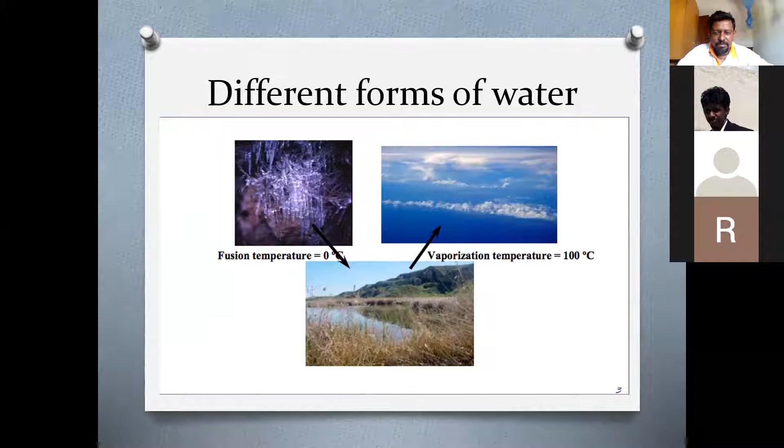Now, this is highly helpful for plants and animals to survive. For example, if water had different temperature ranges, today we would have never evolved into humans.

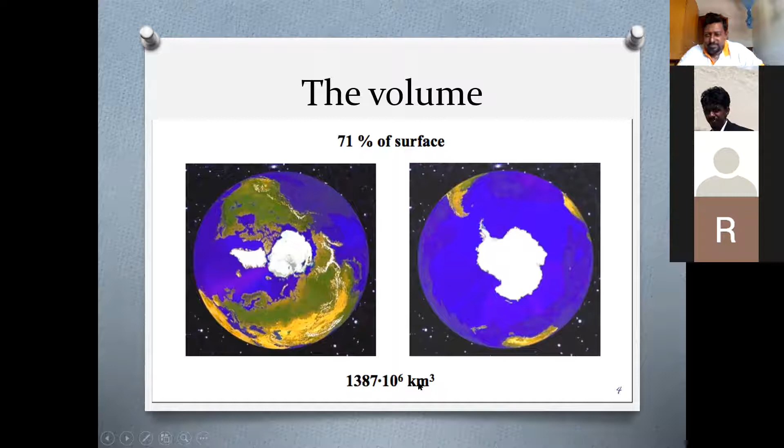Now, when we talk about the volume, 71% of Earth's surface is covered with water, which is roughly 1387 into 10 to the power 6 cubic kilometers. That much water is available on planet Earth. So basically it's a water planet.

So what do you think? What water can we use? Can we use ocean water as we wish? We can't, right? Then the water in glaciers, we rarely use. Then water in groundwater in deep aquifers - is it possible for us to acquire all the water in deep aquifers? That is not possible. Some portion of groundwater we extract through tube wells, but not all, right?

Then basically, this 0.001% in the atmosphere also we can't condense by ourselves and use. So basically we have water in the lakes and water in the rivers. So those are the basic water supplies available for humans.

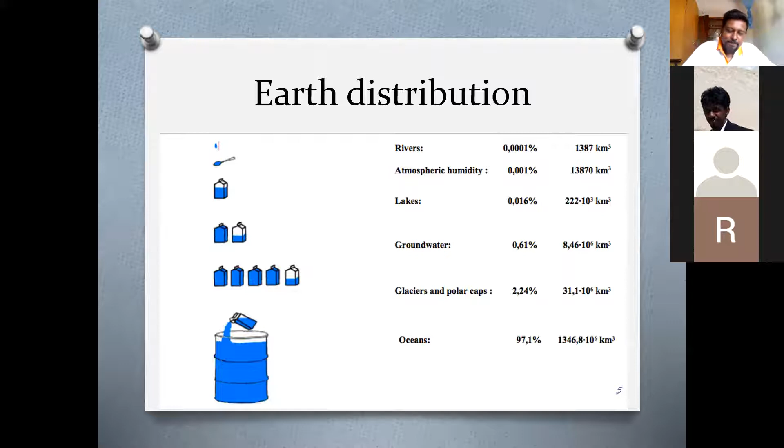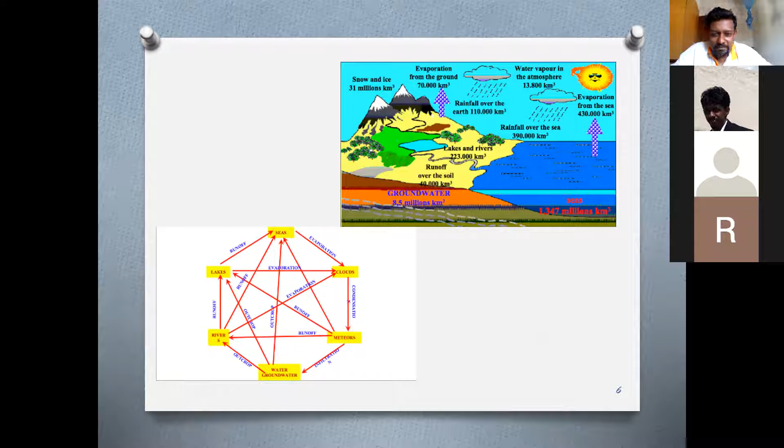Now, when we talk about the water cycle, this picture, I believe you have studied during your school time as well. At grade 6, 7, you have studied this. This is the water cycle, you know how it works. This water cycle is driven by what energy? Who drives this water cycle? Can somebody answer me? It is the sun, right? It is the solar energy which drives this water cycle. So the water gets evaporated by the heat of the sun, and it gets condensed in the upper atmosphere, and it will float with the winds created by the sun, and it will condense and come down, and it will fill our rivers and lakes, and gradually it will flow into the ocean again. So this is the water cycle.

Now the problem with the water cycle is that it is extremely essential for our survival, but with the water cycle, not only water circulates, but also the pollutants. So if you put pollutants into water sources, they could carry by the water cycle around the globe. So India might be polluting their land, and we think that we are not polluting, but adversely that pollution can affect us. On the other hand, if we pollute, our pollutants can end up in other countries.

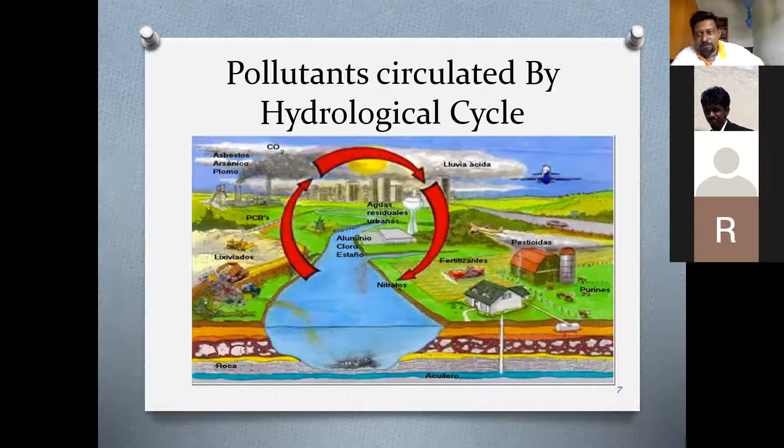So let's briefly talk about the sources of water pollutants. There are two types of sources available for water pollutants: natural water pollutants, and anthropic or anthropogenic water pollutants. The natural ones are produced by natural causes. Gases from the atmosphere like carbon dioxide, oxygen, nitrogen can get mixed in water, so it can create acids in water. Then liquefaction of salts in soil, this is actually the accumulation of salt on soil, and vice versa, the salt in soil can get dissolved in water, other way around as well.

Then organic forms. If you put organic matter into the water, with time it will start decaying, and the rotting things will create a lot of issues in water. It will degrade the water quality, and then the water quality will adversely affect our health. On the other hand, it will affect the environment. It can kill animals, it can kill our fish breeding grounds, it can destroy our vegetation. It can do many damages. It can create many waterborne diseases, non-transmitted diseases, things like that.

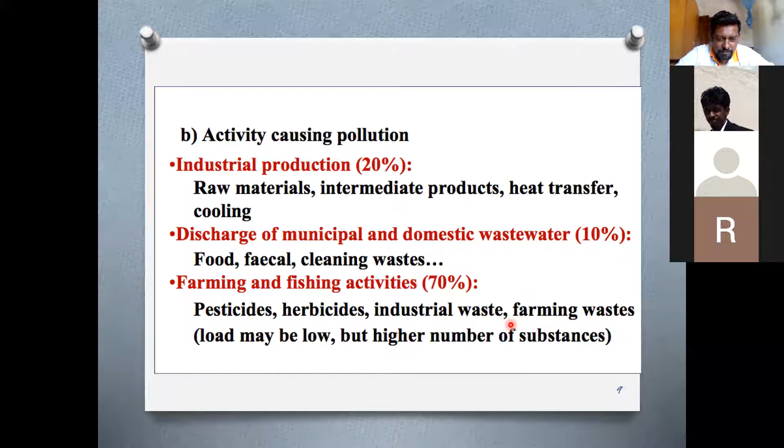If you talk about the geographic origin of water pollutants, there are basically two types of sources: point sources and non-point sources. Point sources are generated at a certain point, while non-point sources produce pollutants over an extent of land or over an extent of line. We'll discuss some examples.

A localized industrial discharge is an example—if there is an industrial factory producing wastewater, it will emit its wastewater at one point, maybe through a pipe at the back disposing wastewater to the natural water body. Non-point sources include application of fertilizers, herbicides, and road runoff, which are produced over an extent of land.

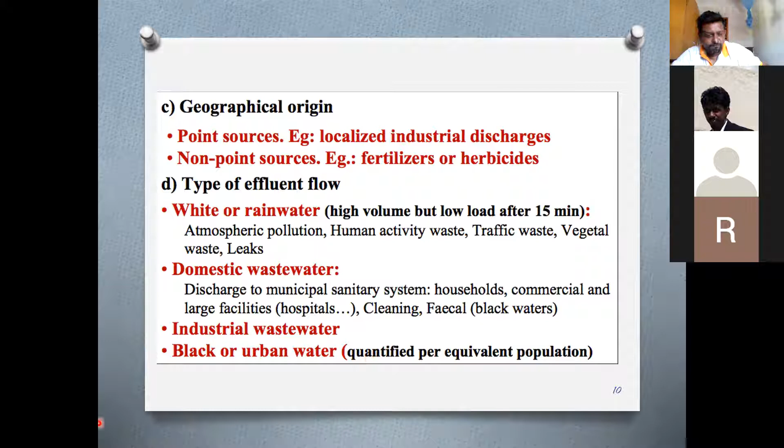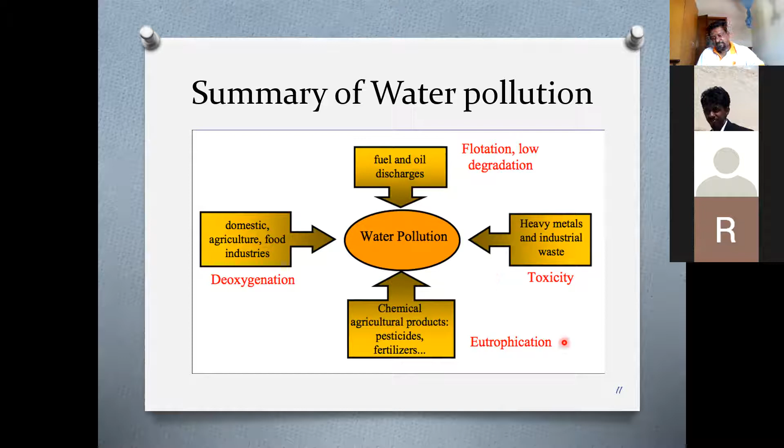Now we are getting into the lesson actually—it's about water treatment. I'll try to run a YouTube video for you. Give me one minute.

Access to fresh water is one of the largest drivers of creating a modern society.

But what allows everyone access to seemingly endless supplies of potable water? It depends on where you live, but chances are behind your tap there's a municipal water treatment plant. There are two main types: drinking water or wastewater plants. We'll focus on drinking water plants here, but if you'd like to learn about wastewater treatment, you can watch the video linked in the upper right. The question remains: how exactly does a treatment plant take dirty river water or well water and turn it into water that is safe to drink? It involves a lot of processing, using chemicals, filters, and removing all of the toxins and hazards from a given source. The entire process starts with something called coagulation and flocculation.

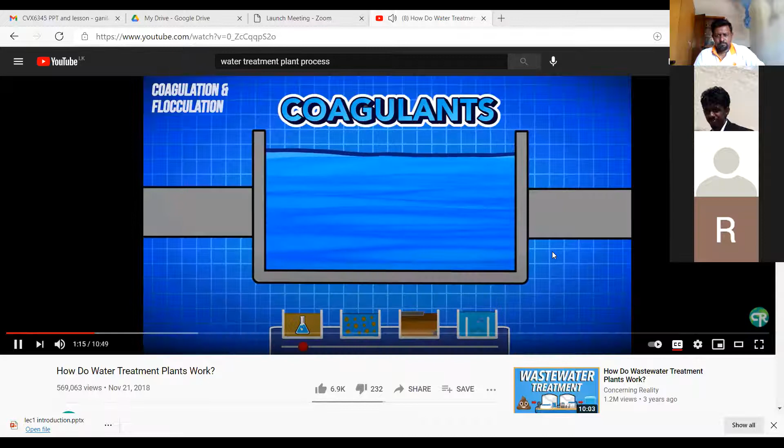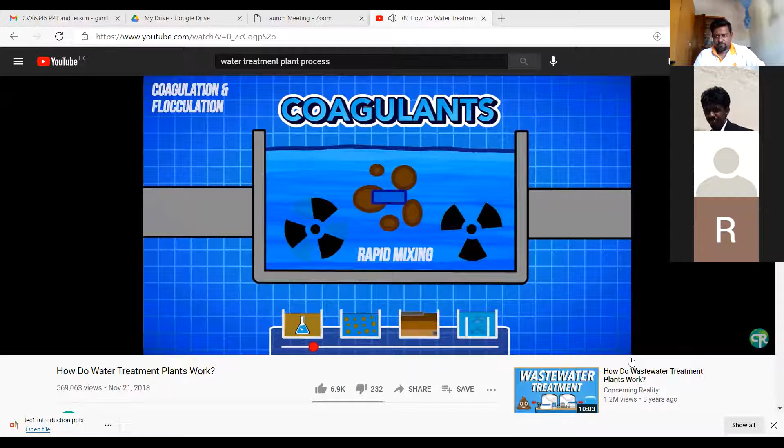All drinking water has to come from somewhere, usually freshwater lakes, rivers, wells, or streams. In these water sources, there's some amount of sediment as well as organic materials. These particles of sand, bacteria, dirt, wood, etc. all have to be removed before the water can be sent out to city residents. To do this, chemicals called coagulants are added to the water. These chemicals, such as aluminum sulfate or ferric chloride, work to help the particles in the water congeal together. Essentially, these chemicals have the opposite charges of suspended solids, like clays or silts. When combined, the charges of the particles are neutralized, allowing them to stick together.

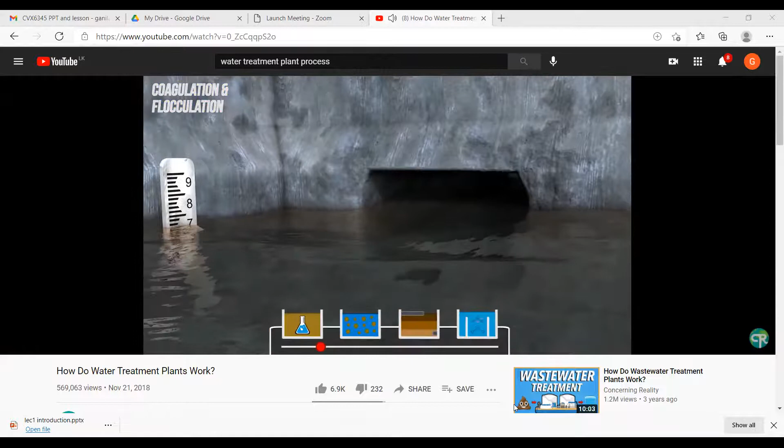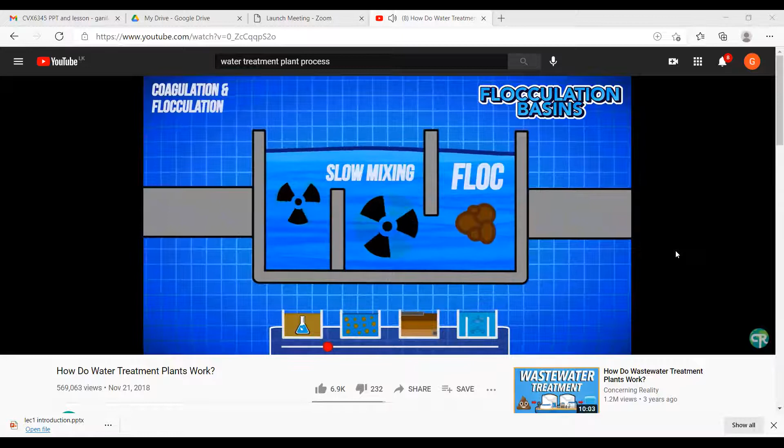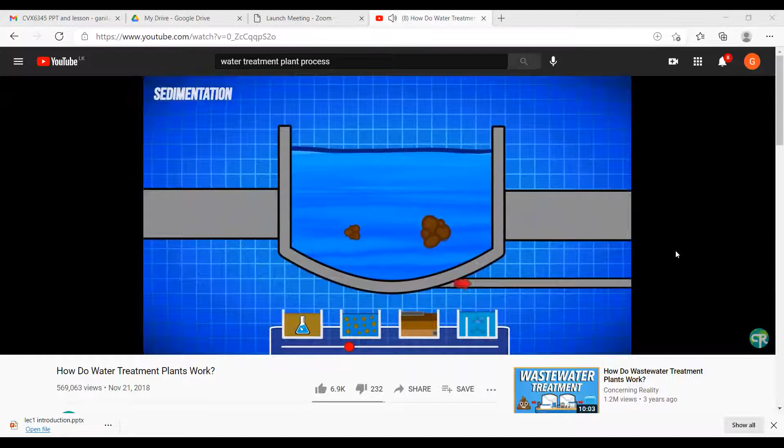Coagulants are often added to the water right at the inlet of a drinking water plant, where the water then goes into mixing basins called flocculation basins. In these basins, the solution of water and coagulant is slowly mixed together to form what are called floc particles. After mixing for a set amount of time determined by water quality, the water is moved to sedimentation basins. It's in these holding tanks where the water sits for the floc particles to begin settling out at a faster and faster rate, which is the intended goal of this process. By simply adding and mixing these chemicals into the water and letting it sit, a large portion of the sediment will settle out to the bottom as sludge, which can be taken away to a landfill or holding facility. The floc particles are ultimately removed from the bottom of basins, and the clean water, being cleanest at the top due to the settling particles, flows over weirs to the next stage in the process.

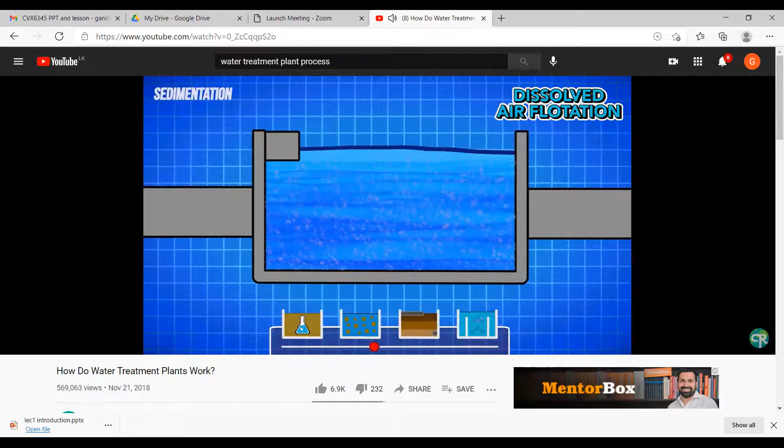Some plants actually use dissolved air flotation tanks in place of sedimentation basins. In these cases, air is pumped into the bottom of the tanks, creating a cascade of tiny bubbles. As these bubbles float to the surface, they take floc particles with them, forming a film of floc on the surface of the tanks. Then a sweeper arm pushes the floc into a collection basin where it's taken to a handling facility. In dissolved air flotation tanks, the clean water is taken from the bottom, where the least amount of floc is. When it comes to designing water treatment plants, engineers will vary techniques based on the water source and how they want their final water to taste, feel, or otherwise be treated.

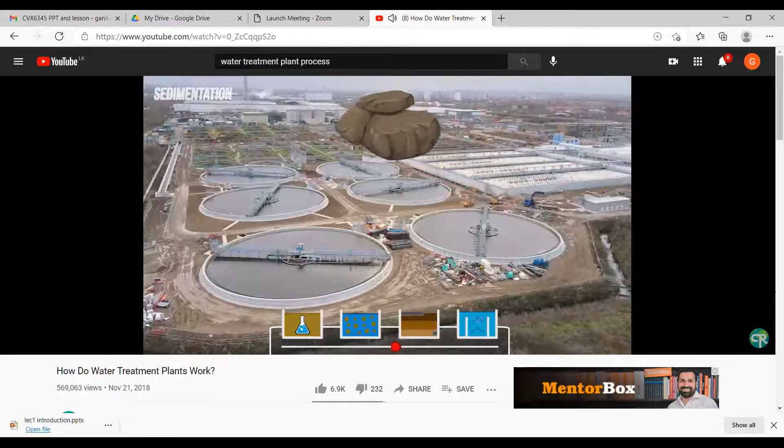The only regulation is the quality of water being pumped to the city, and in most cases, it doesn't matter how plants get the water to that point, which allows civil engineers a lot of creative freedom in the process. After the majority of solids are removed from the water during coagulation and flocculation, followed by sedimentation, the water flows over weirs to the next step, filtration.

The water at this point will start looking clear, but there will still be bacteria and very small suspended solids in the mix. The filtration process will seek to remove the remainder of the suspended solids and bacteria to further bring the water up to snuff. Nearly every potable water treatment plant will use a sand filter for this process. Even in plants where engineers may not think it's needed, often sand filters will be added simply for extra measure to ensure clean water at the end.

Sand filters are exactly what they sound like, a basin of fine to coarse sand that filters water. It would theoretically be possible to treat drinking water with only sand filters, but that would result in frequently clogged sand filters, resulting in lower efficiency and more cleaning time. These sand filters can be set up in essentially two different ways. Either the water flows from the bottom and exits the top, or the water flows from the top and exits the bottom. Each layout presents its own set of unique problems, but the most common technique is actually for the water to flow from the top to the bottom.

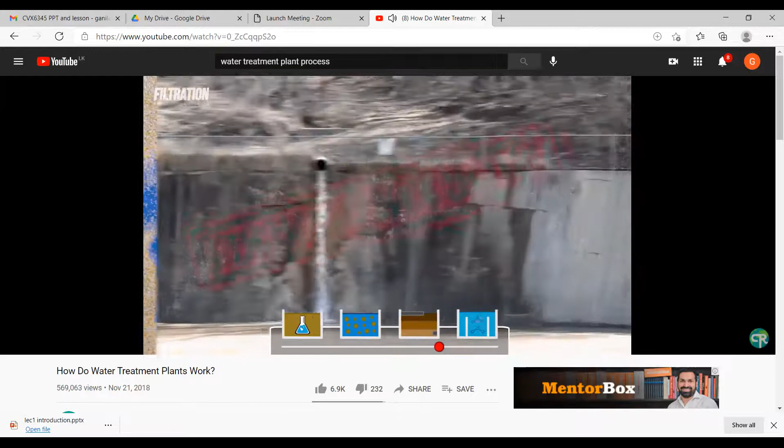Sand filters aren't highly technical. Water just passes through them and particles get caught as they run out of space to flow through. However, while not highly technical, sand filters are highly efficient. Water flowing out of sand filters will need to have a clarity of around less than 0.3 nephelometric turbidity units, or NTU, try saying that three times fast, or whatever local code is used for water clarity. This measurement is essentially just a way to determine the number of particles still remaining in the water, or turbidity.

Many treatment plants will also pass water through activated carbon basins, which you can essentially think of as giant Brita filter tanks. Activated carbon particles have hundreds of tiny pores on them that help remove the tiniest of sediment and bacteria. This process isn't wholly necessary, but it helps improve taste and odor, often a desired trait for city residents.

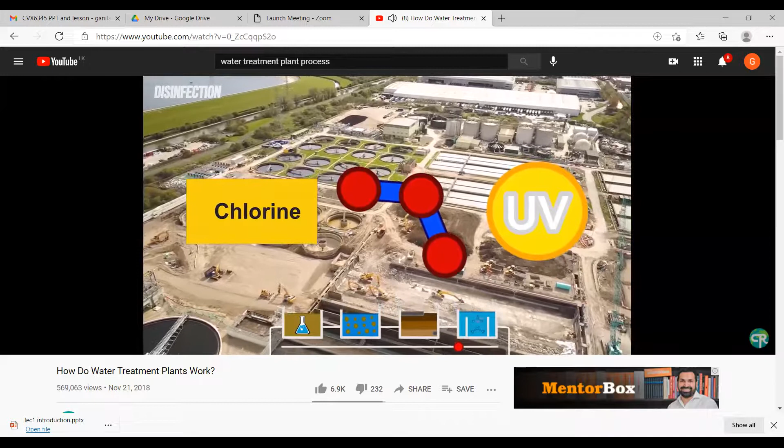At this point, the water should be mostly crystal clear, but there still remains some residual bacteria. That leads us to the next step, disinfection. There are three main ways of disinfection in the water treatment process, which can be used individually or in combination with one another, depending upon design. First, chlorine or chloramine treatment. There's ozone treatment, and finally, ultraviolet radiation treatment.

In the US, the main method of disinfection is by adding chloramines or chlorine-based compounds. These compounds, such as chlorine dioxide or monochloramine, work to kill microorganisms. One downside to this process, though, is that these chemicals can react with other organic material in the water to create disinfection byproducts. These disinfection byproducts are harmful to human health and have to be prevented or mitigated. This extraneous reaction with other organic material is also why chlorine disinfection must come at the end of the treatment process. If added at the beginning, an abundance of disinfection byproducts would be created, causing a plethora of issues for the engineers and plant operators.

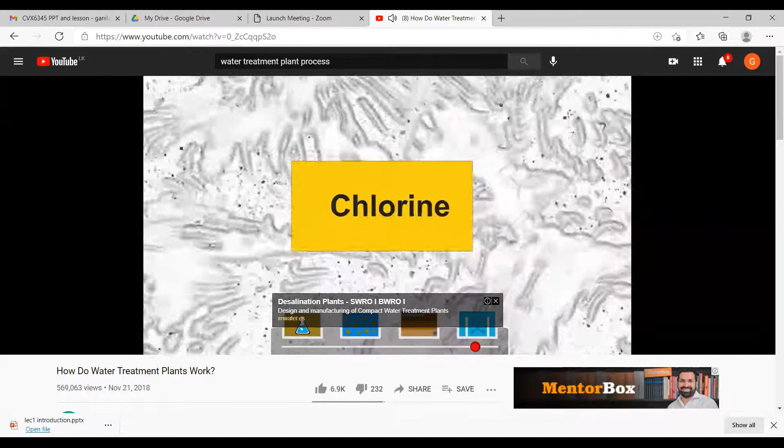Even with all of this, chlorine is used mainly because of how it kills pathogens. It not only kills any pathogens in the water at the plant, but residual chlorine levels also remain in the tap water, killing any contaminants that might get introduced after leaving the plant. Most cities or states will have maximum or minimum chlorine levels in the treated water in order to keep both the water treated and city residents safe.

The other most common method of treatment is ultraviolet radiation. In this process, UV light is shined through the water, which scrambles any bacteria's DNA. This doesn't kill the bacteria, but it makes it impossible for them to reproduce, thus making them harmless. The main downside to this disinfection process is that it isn't residual like the chlorine, meaning that any bacteria introduced to the water after this process can't be treated.

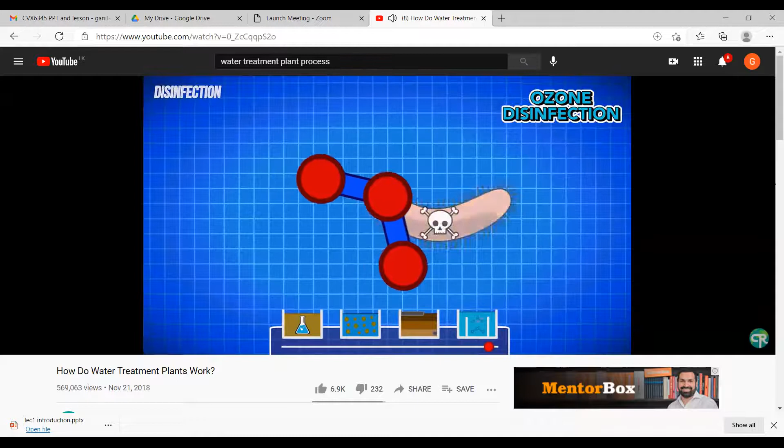Finally, we're left with ozone treatment. This process involves adding ozone, O3, to the water, called ozonation. The ozone kills bacteria in the water as well as improving the taste and odor. In most cases, this treatment process also requires a chemical be used to remove any ozone at the end, such as sodium bisulfite, so as not to cause harmful effects to the city's population or anyone who might drink the water.

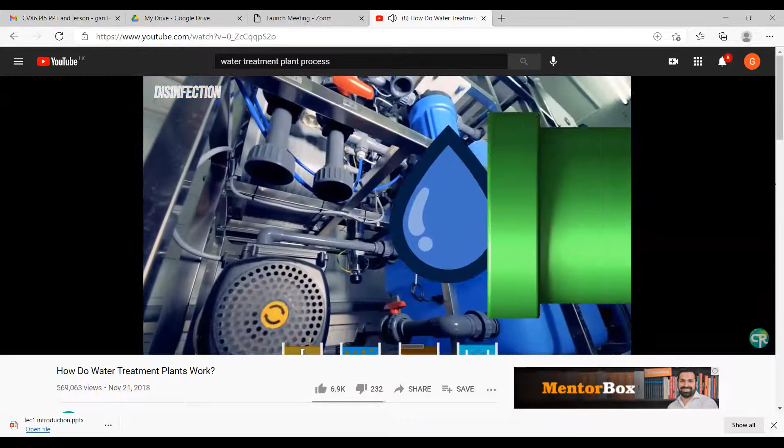After the water is treated in any one of these three disinfection processes, it's ready to be pumped into the city's pipe network for delivery to your tap. The water flowing out of a plant is tested for various levels of chemicals, particles, and other qualities, all outlined in the plant's permit. This permit, set by the governing agency, regulates water quality and holds the treatment plant accountable in the treatment process. At this point, all the water is fit for human consumption per the permit, and the treatment plant is tasked with keeping it flowing through the pipes in your city.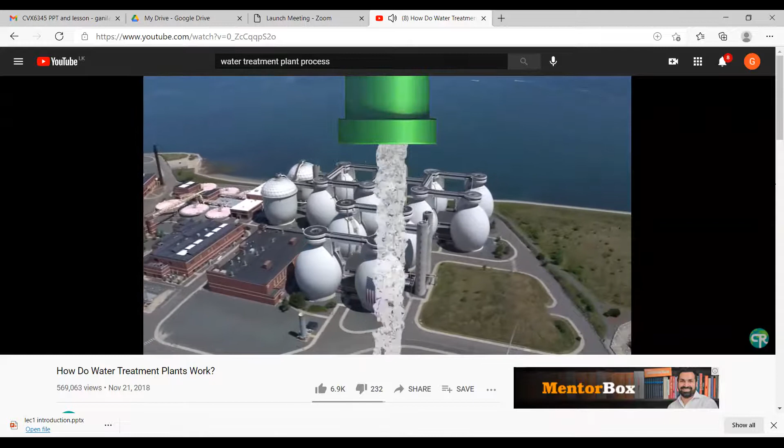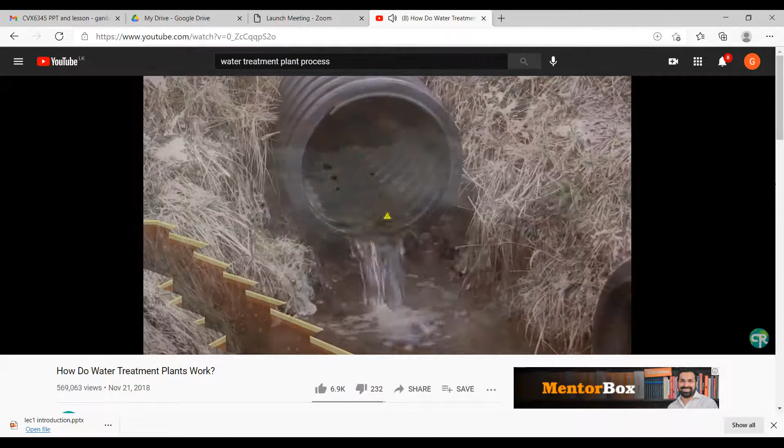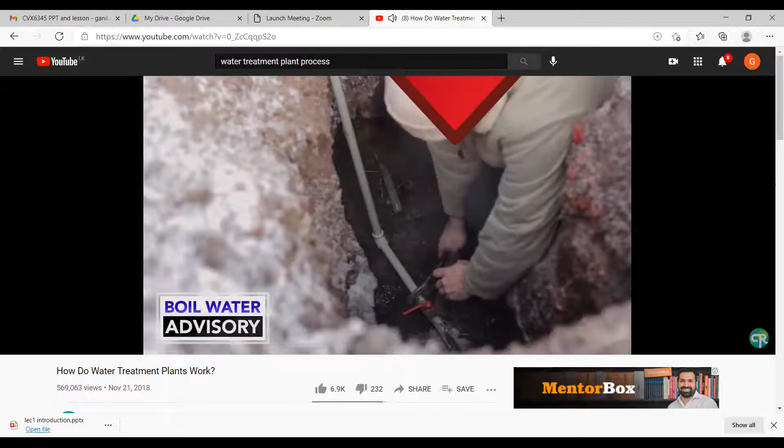Constant pressures of 40 psi must be kept at the outlets of the water in the system so that in areas of high elevation in the pipe network, the water retains residual pressure. One foot in water elevation is directly correlated to an increase or decrease of 0.433 psi. So as water is pumped throughout the city, its pressure at any given point of differing elevation fluctuates. Positive pressure always has to be achieved so as not to let any external water in the ground flow through pipe cracks or joints. This would contaminate the entire system and is one reason why you might experience a boil water notice. Essentially, that means engineers have reason to believe that somewhere in the city's pipe network pressure dropped below the required PSI and water or contaminants might have infiltrated the system.

Massive pumps at the treatment plant supply pressure to the system through constant operation. Some of this pressure can be stored as elevation in water towers, which can give pumps a backup in emergencies or fire flows. In a lot of cases, water towers allow the pumps at the treatment plant to run at a constant rate, which increases efficiency and removes downtime problems. This combination of pumps and water towers allows your tap to remain flowing and otherwise allows you to live in the comfort of your own home.

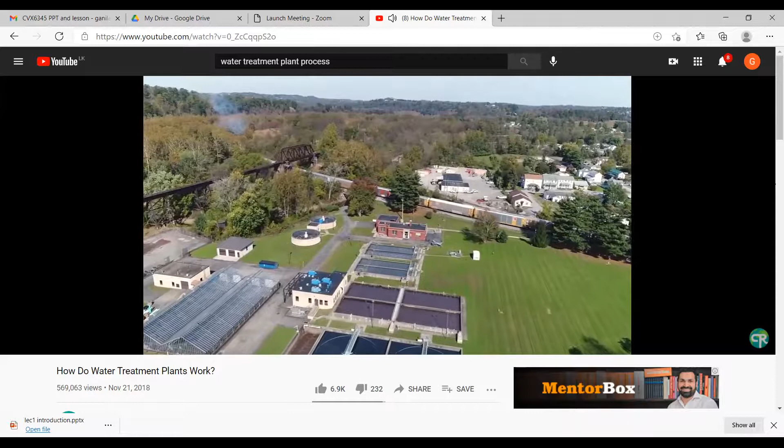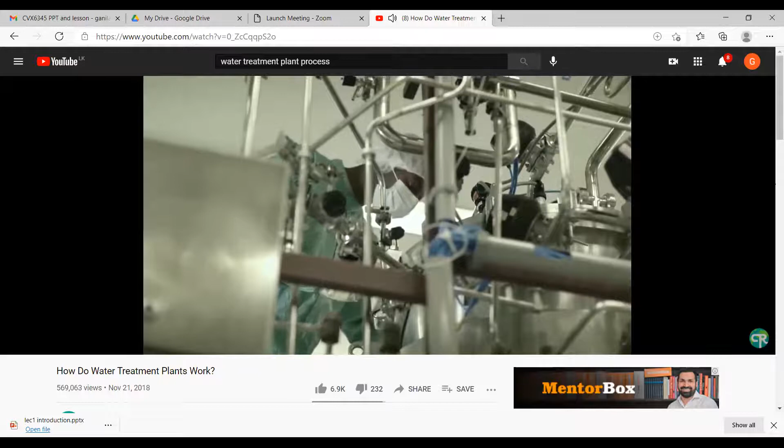Civil engineers and treatment plant operators work around the clock to provide clean water through water treatment plants. At this point, we've taken a look at the most common potable water treatment techniques, but there are tens to hundreds of other deviations we haven't discussed. This draws back to one of the coolest things about water treatment plant design: you're able to use any number of creative solutions to clean the water, and as long as it comes out clean, you've done your job well.

Don't forget about the thankless job of being a water treatment plant operator, though. These men and women work around the clock to keep treatment plants running 24/7 so you can always have fresh water. A lot of time, money, and effort goes into making sure that you can have that nice glass of water on demand.

Okay, that introduces you to the subject. You can understand that there are many processes involved in water treatment. We are going to study one by one, right? Let's go back to the presentation.

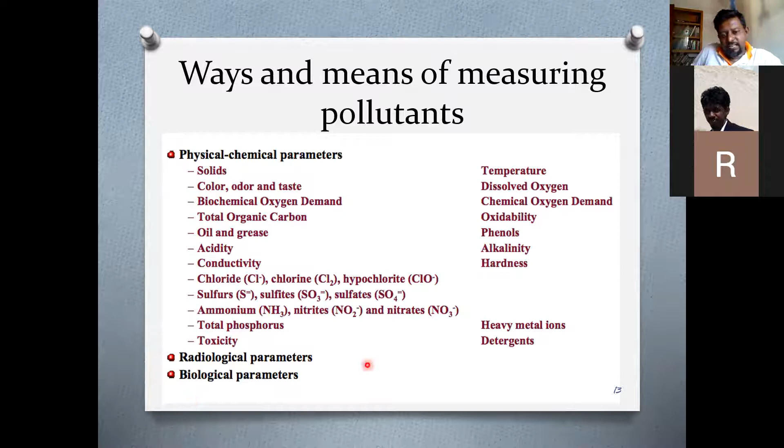Then radiological parameters, then biological parameters - especially when it comes to biological parameters, we are talking about bacteria and harmful bacteria. We call them fecal coliforms, things like that. So the physical characteristics which influence the water are these things.

Now I have clearly extracted this from your note. Can you just read it for 1 minute, please? I think you have gone through it.

Temperature - it says important for its effect on other properties such as speeding up chemical reactions, changing solubility of gases, amplifying taste and odor. So there has to be a certain level of temperature to achieve these things.

Then the taste and odor, due to dissolved organic nature, impurities often cause this problem. For example, phenols, and it's difficult to measure. Now this taste and odor is a human thing, and it is a relative thing. One person might say it is tasty, one person might say it is not tasty. So you need to concentrate on this taste and odor.

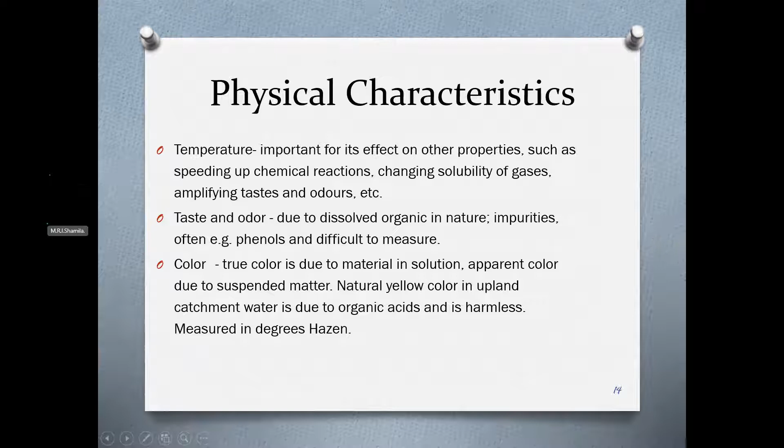For example, if you dissolve certain substances in water - say here, now if you dissolve something here, and if it is suspended among water particles, you might not see its true color. Color of water is colorless, but sometimes we give a color to water. But if matters are suspended here, it won't have the real color.

The natural yellow color in upland catchment water is due to organic acids and it's harmless. Now, if you look at Mahaweli or some other river in upper catchments, it looks yellowish. This is due to organic acids and sometimes due to the presence of certain type of bacteria and algae, but they are generally harmless. There is a unit called Hazen, measured in degrees Hazen, so color is measured using Hazen meters.

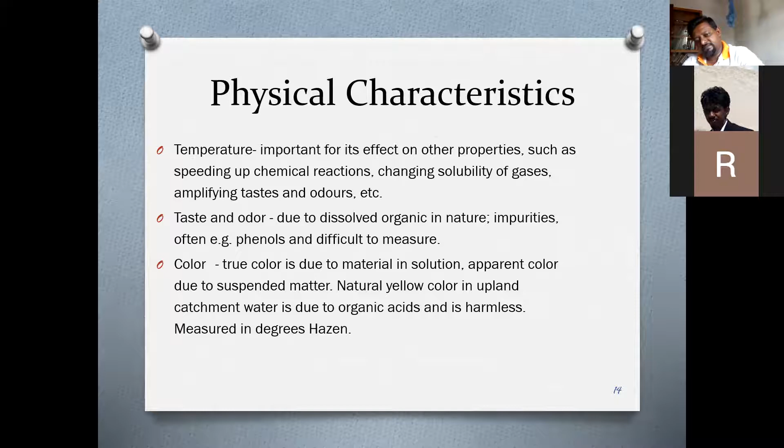Then there is a parameter called turbidity. Can you read this slide as well for 1 minute?

Turbidity is when colloidal solids give water a cloudy appearance. We say this water is turbid if you can't see the other side properly. There is a measure for this called NTU, and we will be studying about this in sedimentation design, sedimentation chamber design, and coagulation and sedimentation.

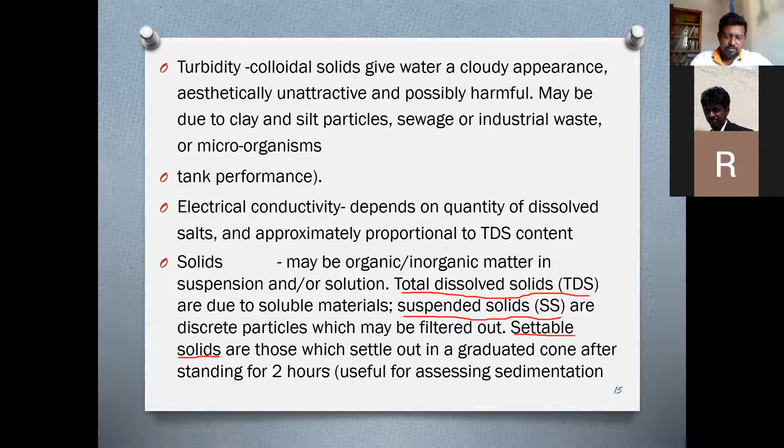Then when it comes to chemical characteristics of water, there is pH - of course you know what pH is, it is the power of hydrogen. Then alkalinity - we call water alkaline if the pH value is above 7, due to the presence of bicarbonate, carbonate, and hydroxide. It is useful as it provides buffering to resist changes in pH.

Then acidity, which is the opposite of alkalinity. When the pH value is below 7, we say it is acidic. If it is too acidic, it is harmful for us. For acidity, there are different ranges - you can read it from the notes.

Then hardness - the property which prevents lather formation with soap. It produces scale in hot water systems due to metallic ions of calcium, magnesium, iron, and manganese. These are serious issues in Sri Lanka - if you go to certain parts of our country, hardness is a serious problem.

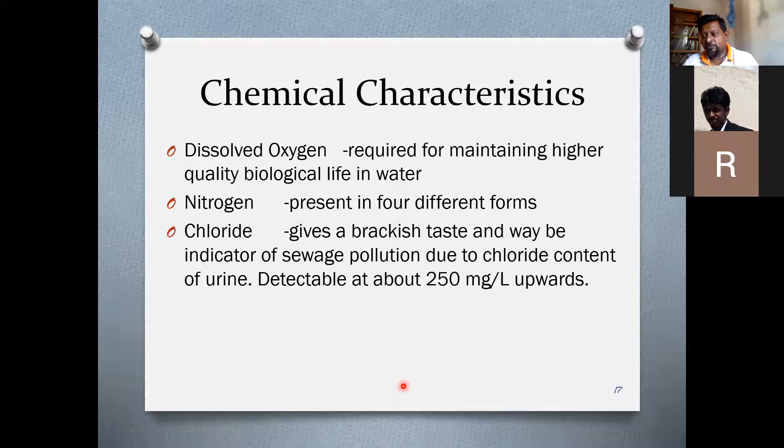Then nitrogen is present in 4 different forms - you will be studying about nitrification and denitrification process later. The chloride gives a brackish taste and may be an indicator of sewage pollution due to the chloride content of urine. When you urinate, urine contains a fairly high amount of chloride, so if the natural water is high with chloride, it means there is sewage pollution of that water.

Now we were talking about parameters, the way of measuring water quality. But to really measure the thing, we need to have certain standards. For example, if the parameter goes above the standard, that means the water is not good. These standards are established by SLS.

In Sri Lanka, it has been declared by the authority as Sri Lanka Standards, SLS 614:2013. There was an earlier version as well, but this is the latest one, the 2013 guideline. The limits declared for each water quality parameter is the maximum permissible limit, meaning these parameters should be below these limits. If it is above these limits, that water is objectionable for consumption.

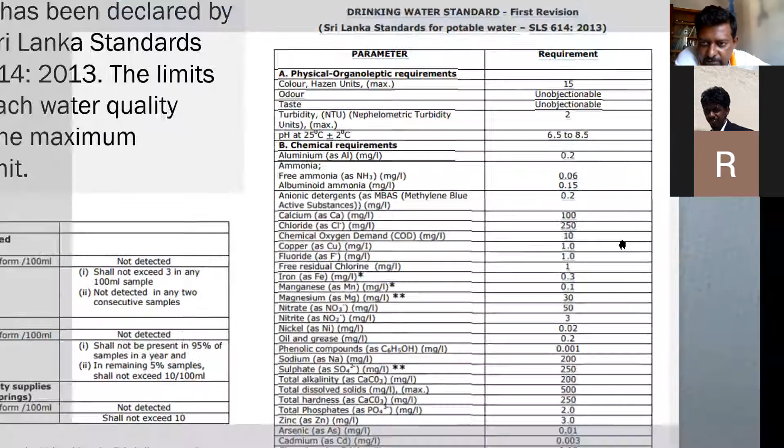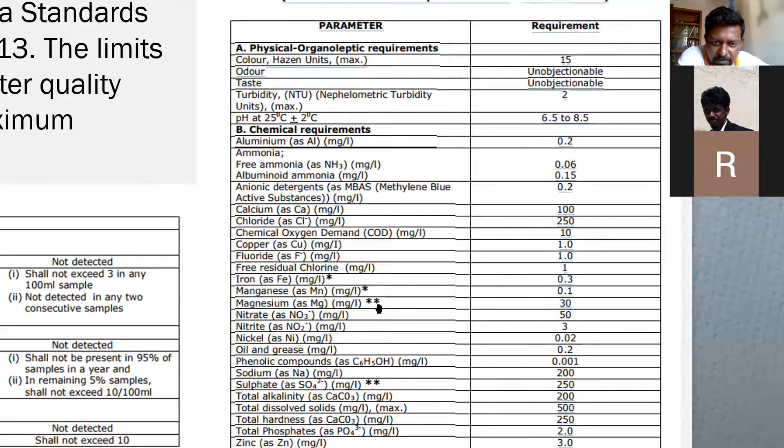Let's enlarge this portion and see. For example, let's take pH - it has to be between 6.5 to 8.5, that is the range for drinking water. Then if you go to nitrate, nitrate has to be below 50 milligrams per liter, or ppm. So these standards are established, there are many parameters, you can read them by yourself.

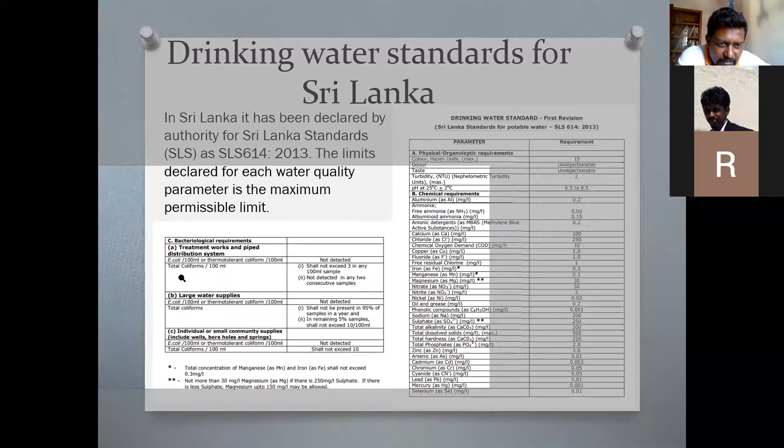Then when it comes to biological things, here you can see the total coliforms. We will be talking about these things in disinfection. There, the limits are declared here.

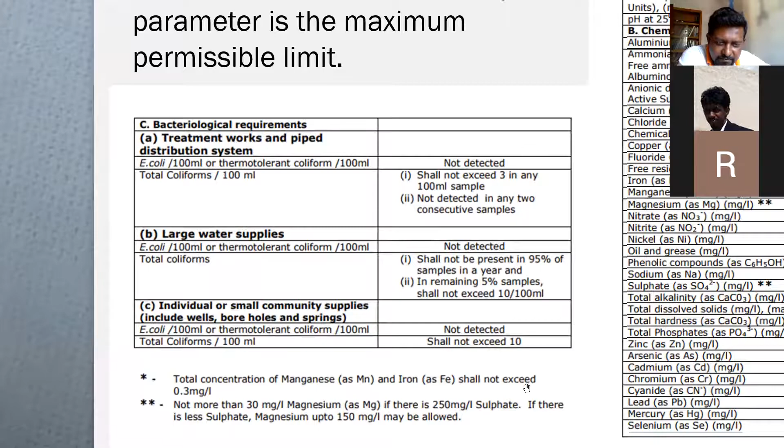In order to design a treatment plant, first you need to know the quality of the source. Then you need to know how much water is required to be treated, so for that you need to forecast the water demand.

In order to design a water treatment facility, we should predict the future demand for water caused by population growth. If the population goes up, the demand for water will also go up, so you need to predict that. There are two models to predict future demand, namely linear model and exponential model.

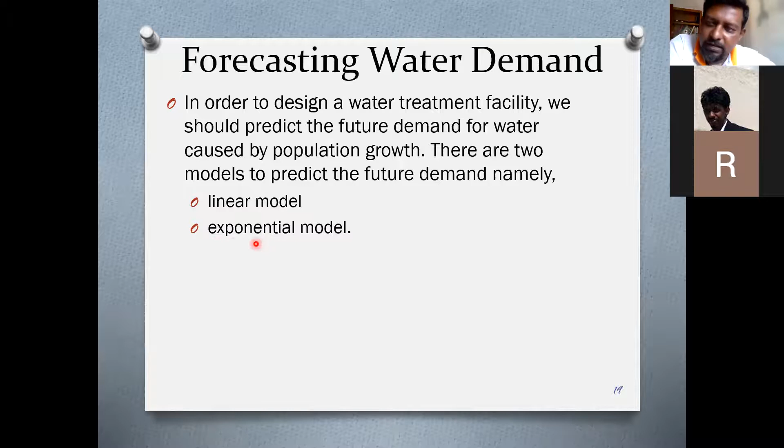We normally adopt the exponential model, and these things are there in your book. I have taken this from a water board guideline for designs. First you need to get some statistics from census data, plot it, and predict it for coming years using this equation.

Pn equals P into 1 plus R to the power N. R stands for growth rate at the projection time. N is the number of years you are planning to project. P is the base population. If you are doing it from today's statistics, today's population, let's say 2.3 million, you have to use that. If it is 100,000, you have to use that.

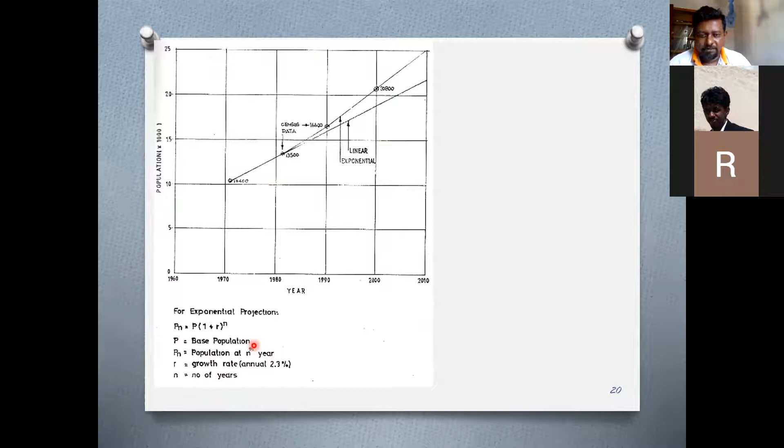Then the steps in determining the water demand. Now to do this exercise, you have to do it systematically. If you don't work systematically in design, you will be messed up with your work.

Now, first step is to select a per capita water demand for domestic use. So what is this per capita? Per capita is per person, per day. Per capita is per person.

So if you click this, now this table is also there in your notes.

Per capita water demand varies according to your lifestyle. For medium and rural, it is around 120, for 1,000 to 1,500 consumers. Large rural, 1,500 to 5,000, normally around 140 liters per capita per day. Small urban, 185. Medium urban, 185. Large urban, if the population is above 20,000, we consider it as a large urban design. If you are designing for a population above 20,000, it needs to be separately assessed. You need to do a proper assessment to make an estimation.

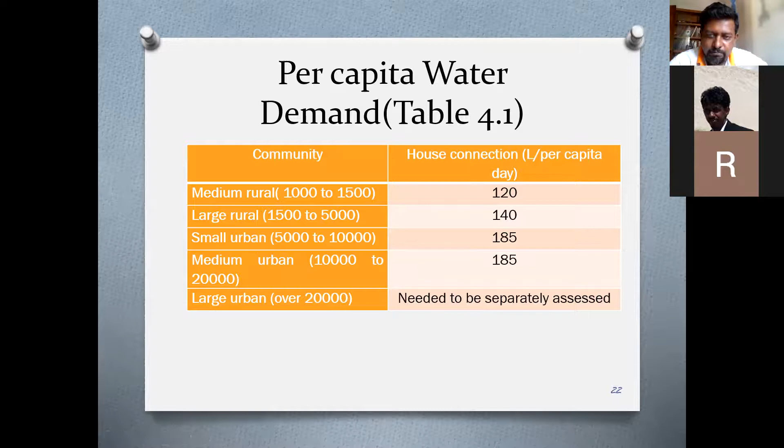Now, next step is to determine the institutional demand. What are institutional demands? What is open university? Is it a manufacturing plant or a manufacturing industry or an institution? It's an institution, and you can see for different institutions there are ways to calculate demand.

For example, hospitals, it is calculated as 220 to 300 per bed per day. Let's say if you have a hospital of 500 beds, you have to take a value and multiply it by 500. For hostels, we have to consider a value per bed and calculate. Then boarding school, per resident - of course you have to calculate it per person basis. Then for restaurants, it is per seat. Let's say if you have a restaurant of 90 seats, then you multiply by the number of seats. Then bus and railway stations, per user.

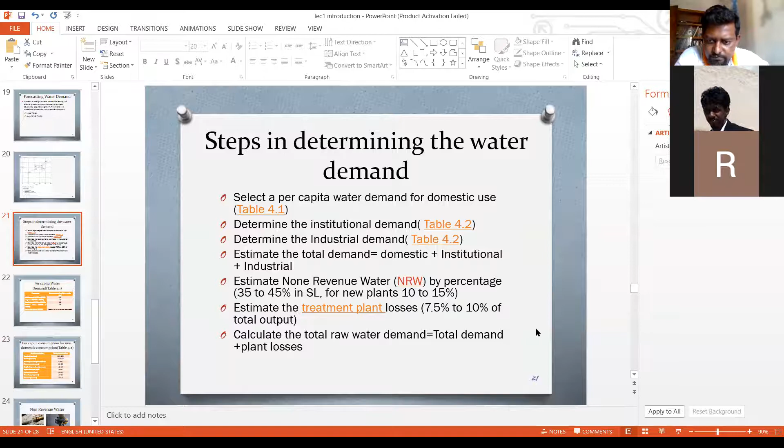So once everything is calculated, as you can see in this slide, to calculate the total demand, you just have to add it up. And after getting the total demand, you have to add on top of that something called non-revenue water.

So what is this non-revenue water? Normally it is around 35 to 45 in Sri Lanka. For new plants, it is around 10 to 15%. We'll see what this NRW is.

Now NRW, or non-revenue water, is the loss of water without billing. Let's say you have a water meter at your house. So when water is sent to you, if the water is lost between the plant and your house on the plumbing, it will not be billed to anyone.

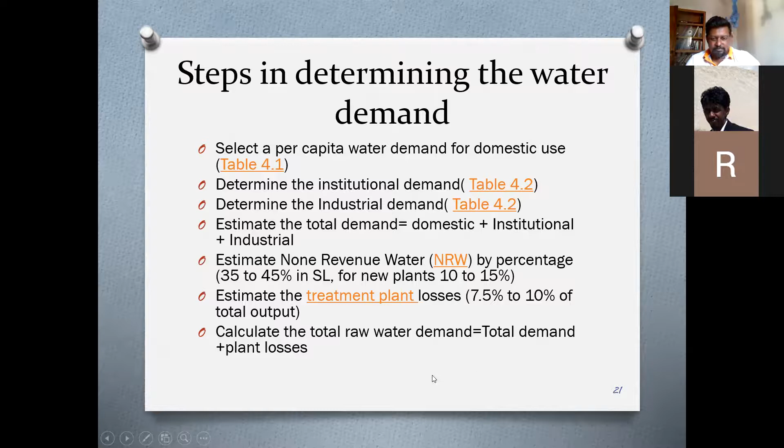Now we are moving into water treatment plant. Now this diagram I have extracted from your book. We take water from a water source, we screen it, then we send it through several steps in order to produce fresh water for consumption.

Now this process consists of several steps as you were shown during the video as well. So first you have to do screening, then aeration, coagulation, mixing and flocculation, sedimentation, filtration, disinfection, storage and distribution. So these things you have to do in a typical treatment plant, right?

Now today I'll be discussing about screening. After that, the other things I will schedule for a new day in school, and I will let you know through emails, and I will also put that in the faculty common course and let you know, right?

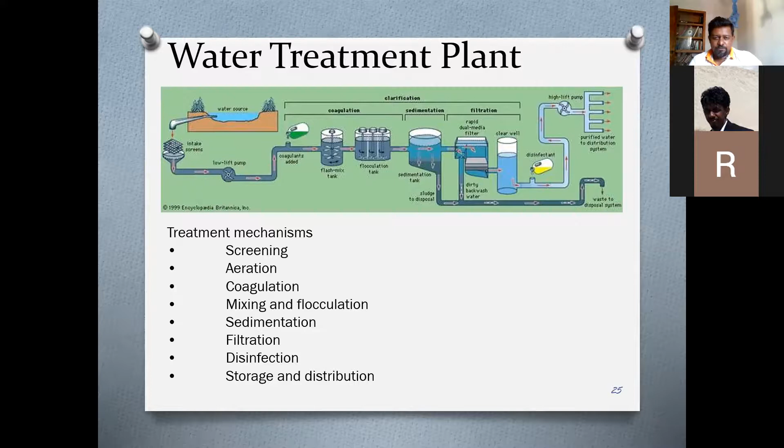Now screen. Once you have started getting water from the source, the water that is coming might be full of debris and suspended matter. So this floating and suspended matter mostly can be removed using screens. There are two types of screens. One type is called coarse screens. So can you just go through this for 1 minute, this slide?

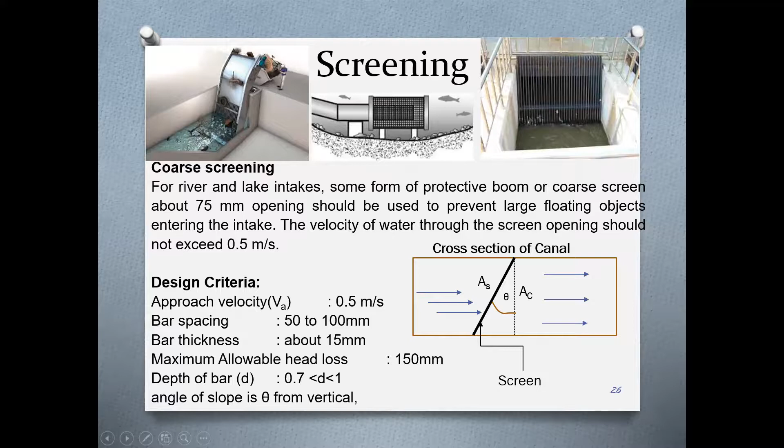Okay, right. So for rivers and lake intakes, some form of protective boom or coarse screen about 75 millimeter opening should be used to prevent large floating objects entering the intake, right? If the large objects go to the treatment plant, it might damage your pumps and other elements. So you have to prevent that. The velocity of water through the screen opening should not exceed 0.5 meters per second. If it is coming at a very high velocity, it could damage your plant. So you need to protect it.

So to design, these are the parameters. Approach velocity has to be 0.5 meters per second. Bar spacing 50 to 100 millimeters. Bar thickness about 15 millimeters. The maximum allowable head loss in the system is 150 millimeters. Then the depth of the bar is 0.7 to 1. Angle of slope is theta from vertical.

Now this shows a cross section of this channel. The cross section of this channel, right? Please follow this carefully. The cross section, let's say the cross section of this channel.

The longitudinal section is shown here. This line represents the bar screen, which is at an angle of theta to the vertical. The flow is approaching and you need to calculate the required area of the screen.

If this is AC, the cross-sectional area here, what is the area of AS? AS equals AC sec theta. I'll show you - this is the slope theta. So AS equals AC sec theta.

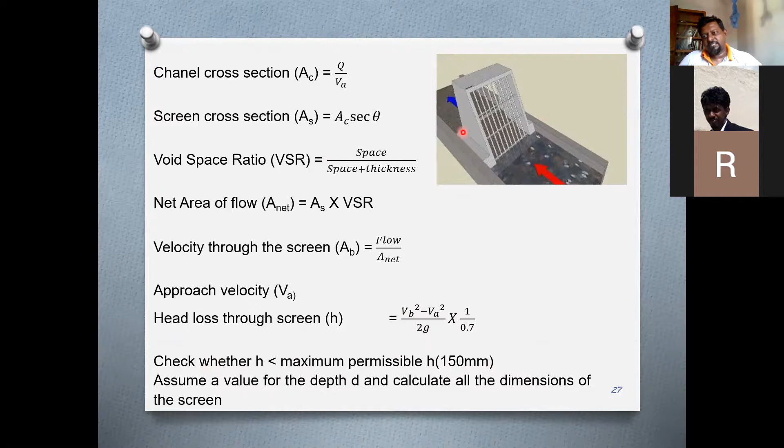0.7 is a factor - when water goes through an orifice, there are certain losses, and this is how it is calculated. VA is the approach velocity, VB is the bar velocity, so you can calculate the head loss through the screen. It has to be less than 150 millimeters - this is the design limitation. If it is less than 150 millimeters, this is accepted.

Now we will move into fine screen. I'll not do a fine screen design - I think it should be done in 7242. So you can read it for 1 minute.